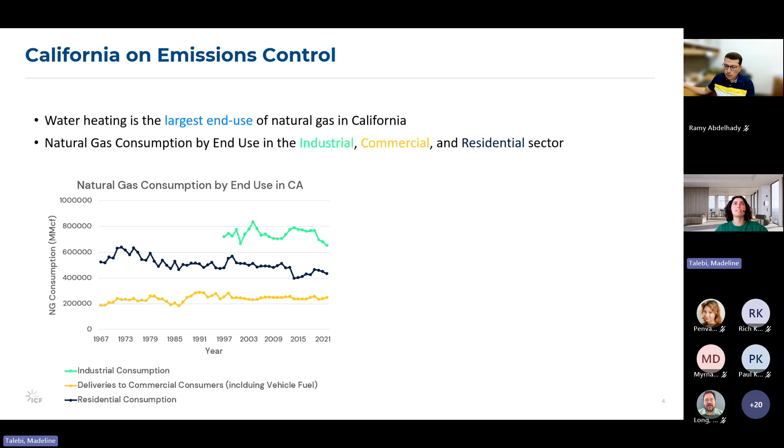So briefly, California on emissions control, why we're interested in water heating specifically. So it is the largest end use of natural gas in California. And then if we look at natural gas consumption according to sector, we see industrial, commercial, and residential have the highest impact. And so looking at California legislation, so between Title 24, our building energy efficiency standards, and then Tech Clean California, just a couple California legislations that would support us looking into water heating specifically for the residential sector. So not the highest in terms of consumption, but still a sizable impact that can be had.

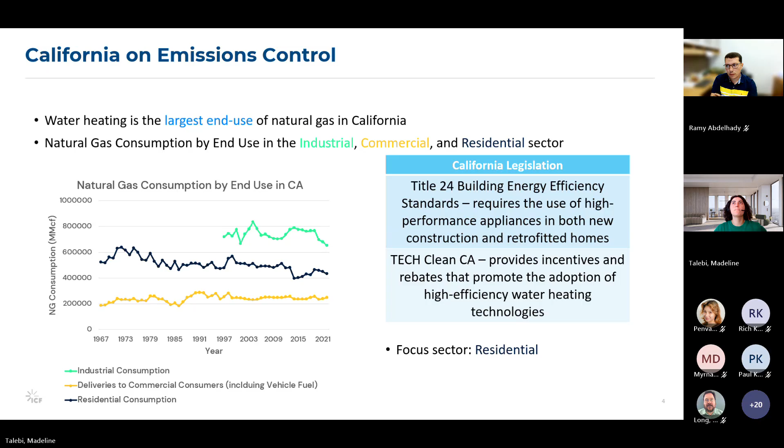And so the technology in this case is going to be a gas-fired adsorption gas heat pump. So you'll see it abbreviated as AHPWH throughout the presentation. So this is going to be essentially focus shifting to development of highly efficient thermal heat pumps for residential water heating. So we'll call this unit manufacturer A for the purpose of the presentation.

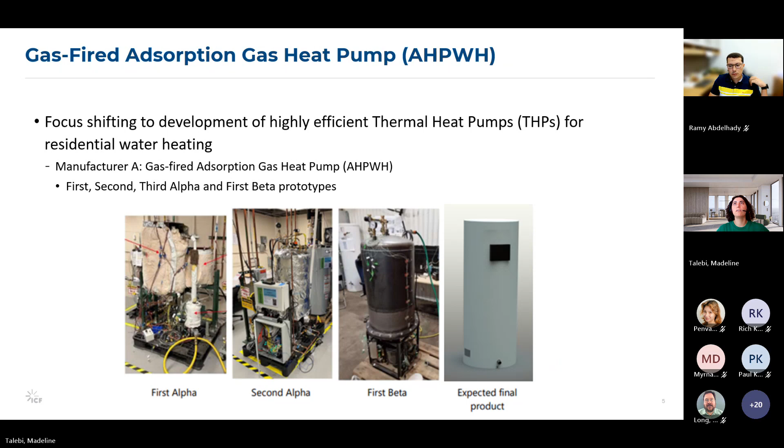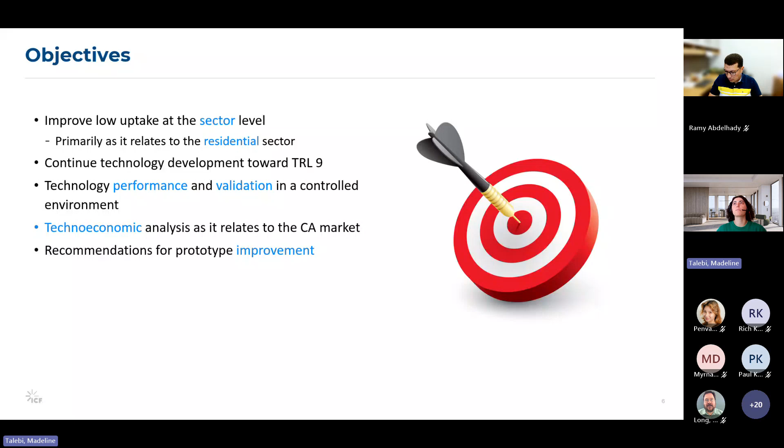And so the objectives for this testing, it's to improve the low uptake at the sector level, so that being the residential sector, continue to develop the technology towards a technology readiness level 9, just because this is in a beta phase. And then to look at the technology performance and validation in a controlled environment, so that being the lab study, and then looking at a techno-economic analysis as it relates to the California market, and then recommendations for the prototype improvements moving forward.

And then alternatively, in the adsorption phase, we have low-grade heat absorbed from the air into the evaporator. The ammonia then evaporates and would move back to the salt matrix. And then when ammonia is adsorbed into the salt of the salt reactor, the heat of reaction is supplied to the indirect tank again, or this buffer tank.

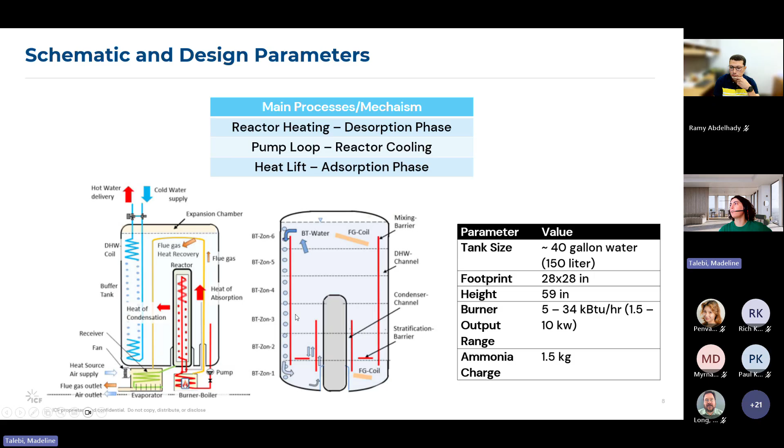Once we receive the unit, we do a commissioning test. One thing we need to figure out first is the system's function once we receive it. So we install the unit at GTI Energy, on one of our residential water heating test beds, to make sure the firing is good and everything was working as it should be. So the first thing, we heated up the tank using a 7 kilowatt firing rate, and made sure the temperature stratification is well established.

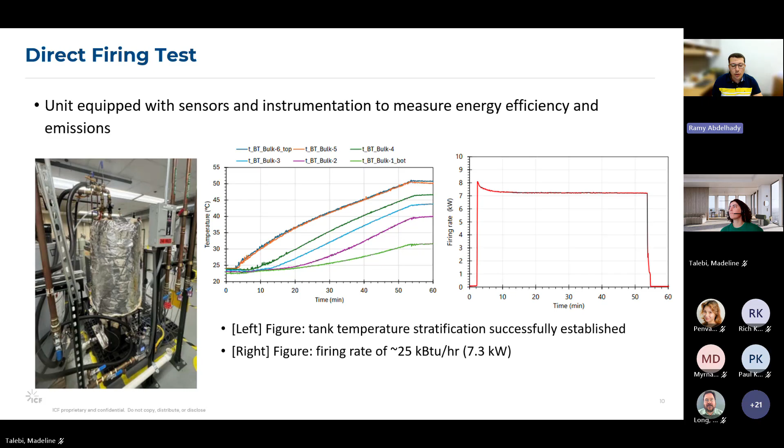As you can see in these 2 diagrams, firing rate is almost constant, so they have stability in the combustion system, and also the tank can maintain stratification. So once we heated up the tank, we let it cool down. Next. So we need to cool it down to assess the insulation that we added to the tank. So we let the system cool down for a longer period of time, almost 1 day, and we track the average tank temperature.

So we found the tank loses about 0.5 degrees C every single hour. This translates to a heat transfer coefficient, or thermal losses, of about 7.8 BTU per hour per Fahrenheit. This is a good number. So the heating system is working well, and also the insulation is in good shape. So we can start the main testing. Next.

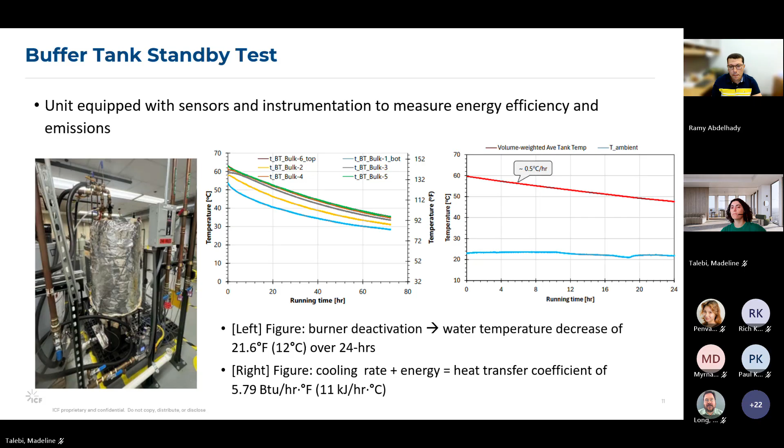So then we did a DOE standard evaluation for this, including the first hour rating and UEF. So we did the first hour rating, how many gallons this tank can deliver over the first hour. So we used one firing rate. We assumed it to be 2.8 kilowatt, which is about 9.5 MBH. We found it can deliver 22 gallons.

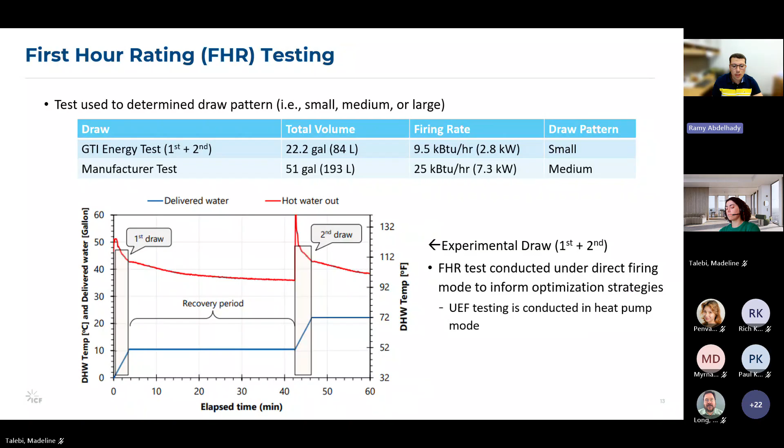Before we got this unit, the manufacturer did a test at the maximum firing rate, which is 7.3 kilowatt, and the manufacturer calculated 51 gallons per hour. So this sets this technology at a medium draw bin. So based on this, we moved to the UEF. We applied the standard profile from DOE using a medium draw profile, and we did the first UEF test. Next.

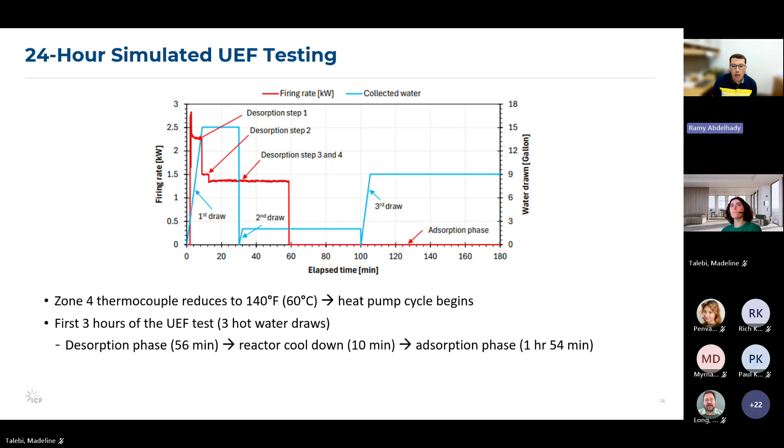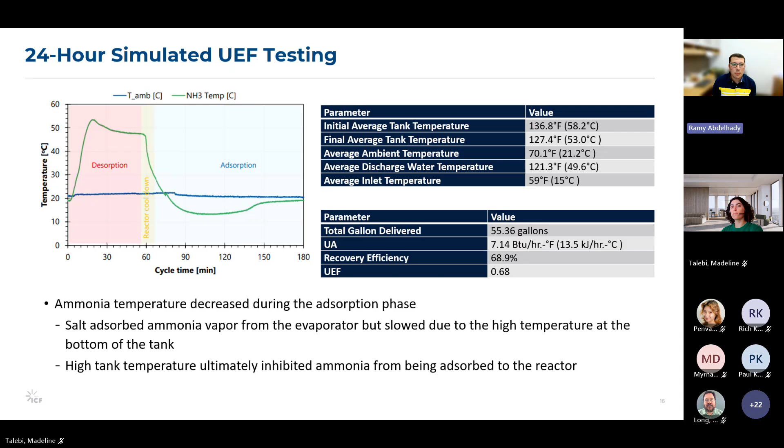So overall, the tank delivered about 55 gallons per the schedule, and the standby loss is 7.14 BTU per hour per Fahrenheit. We calculated the recovery efficiency at about 69%, and the UEF came close to this value, about 0.68. This 0.68 means it needs to be improved, and we need to work on the system to take it to the next level. But the main point here is the system is able to lift energy from the ambient, and the heat pump is working. Next.

So from here, we need to do much improvement in terms of emission and burner. It met the standard, which is good. Next.

So now we have some thoughts on improving this efficiency to push it above one. And if we can push it above one, how is it going to affect the energy saving compared to the standard gas-fired water heater? So we did some techno-economic analysis, theoretical analysis, assuming this UEF can exceed 1.1, 1.2, and seeing what the energy cost, utility bill, and greenhouse gases would be. For this modeling, we used BEopt, which is a tool from DOE, and we simulated the residential load profile assuming a single family home with 4 occupants, and we compared this with another technology. Next.

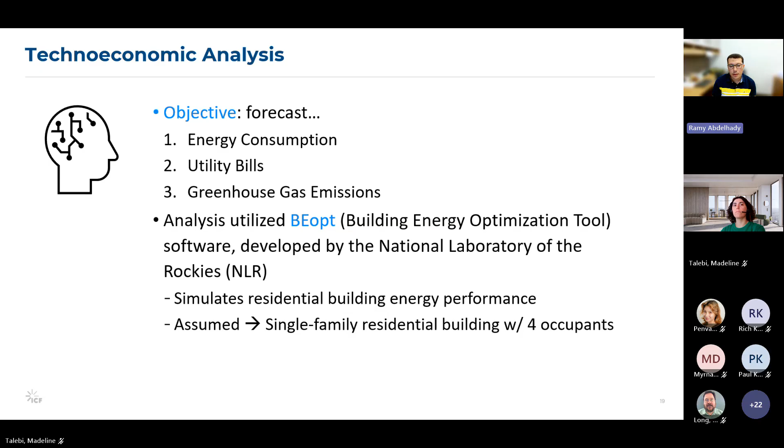So we assumed that if this system, after further development, can achieve a high UEF value, what would be the reduction in energy cost? This figure shows two different locations, Los Angeles and San Francisco, and how much natural gas you're going to reduce, and CO2 emissions and your bill. If we can improve this UEF from 0.68, which was experimentally measured, and push it to 1.1 after further development, we can achieve about a 30% reduction in cost and also in emissions in two different places in California.

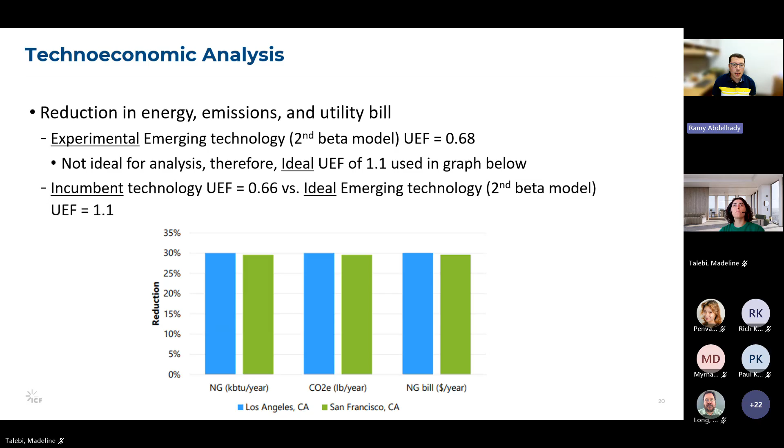So this result shows this technology is promising, but still we need further improvement in terms of design and performance. This is what I think Madeleine will touch on.

Thanks, Rami. So just to give some high-level key takeaways and recommendations. Overall, this study does align with federal initiatives and California decarbonization strategies, as I mentioned at the beginning. The FHR test under direct fire resulted in a total draw of 22 gallons, at roughly a 9.5 kBTU per hour firing rate. And the unit achieved a UEF of 0.68 with a recovery efficiency of 69%, showing promising results but also room for improvement.

Again, this is a prototype model, but this is definitely a good start with this beta model, of course. And then looking at future studies, some of the results that Rami had presented revealed that there could be improvements related to burner quality, material insulation, and overall structural design. There are studies related to temperature stratification within the buffer tank. That would optimize the adsorption process and minimize energy losses.

And then looking at the techno-economic analysis, which reflects the actual experimental results, to quantify savings where the unit achieves a UEF greater than 1. So overall, some recommendations and improvements on the beta model itself that could essentially simulate more favorable results in this case.

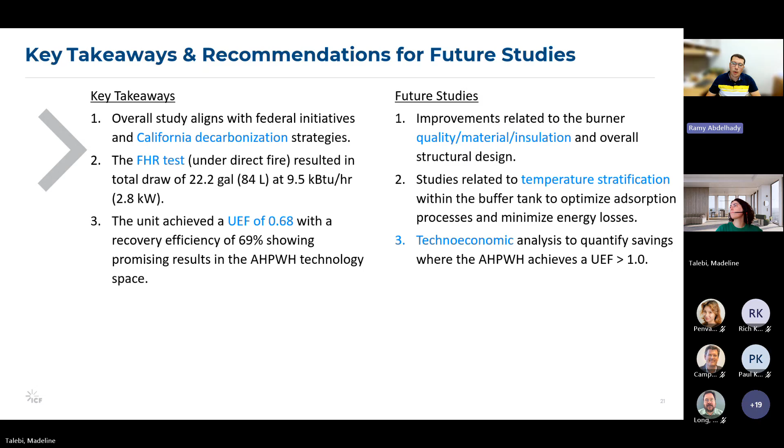Yeah, I can add more here besides what you said, Madeline, the thermal compressor of the system, which is the reactor. We need to do some improvement in terms of how we generate the ammonia and adsorb the ammonia, and also the temperature stratification inside the tank needs to be improved, because during the adsorption we need cold water, less than 40 degrees C, to facilitate the adsorption. As the curve is showing, temperature increases and after a short period of time decreases because the adsorption period was very short. So we need to extend this duration of operation by improving the reactor design.

Yeah, that's exactly it. Thank you. So technically, we need to be able to lift more energy from the ambient to exceed the limit.

So another question: would it be legal to install it in California? What would be the timeline for getting it CEC certified? I'm not too sure. I don't know if Stephen, you have additional insight on this, but I don't believe we could install it, outside of maybe a field study in this case. Yeah, I'm not really sure of the code process to get things approved, but obviously they would need to get their UL and ETL and everything else dialed in as well.

Also, we need to keep in mind this is emerging technology. So after fully developing this technology, we need to go through this certification and also compliance with the DOE standard as well and AHRI. So there are many things in terms of regulation that need to be done, but after fully developing the system. The manufacturer has requested to be anonymous, so I won't be able to share, unfortunately.